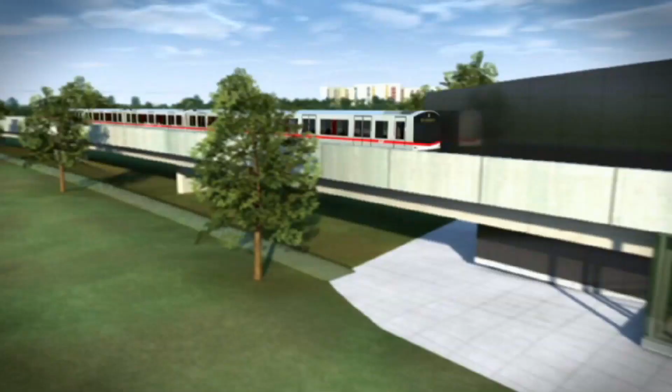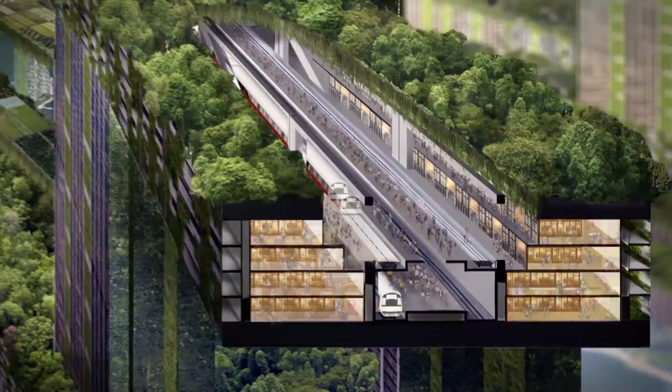It's happening here and now. New urban landscapes are emerging before our eyes. But what will our cities look like in 20 or 50 years? Will they be more livable? Or is urban improvement merely a utopia? The answer lies in intelligent planning, innovative building technologies, and urban greening.

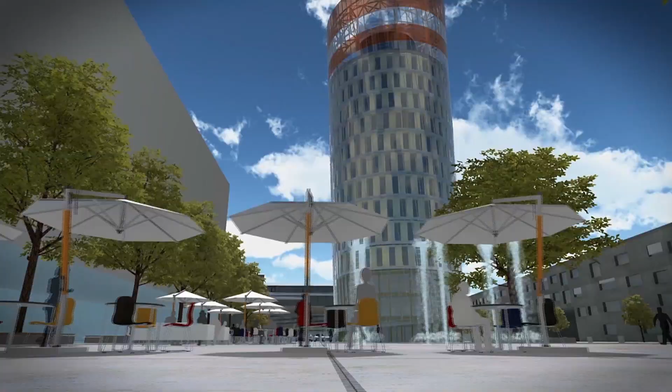Today's so-called smart cities are the proving grounds for the cities of tomorrow.

Singapore is a leading business location and on its way to becoming a so-called smart nation. The small city-state, barely twice the size of Vienna, can only grow in one direction, upwards. 96% of Singapore's 5.6 million inhabitants live in high-rise buildings. Sustainable construction is encouraged by the government, since water, energy, and building materials are scarce.

Singapore's University of Technology and Design offers classes in sustainable architecture. One of the professors comes from Austria.

And then the courtyards and all these open void spaces in between. But you can also see that the concrete elements are shaped in different ways, and these features also provide shade to these parts of the facade. Singapore, since we're almost exactly on the equator, we have most solar impact on the east and west facades. That's why on the north and south facades we have very long stretches of facades because there's not much solar impact. But then when you look at the ends, all the east and west facades are very small, so they don't have as much solar impact at the ends.

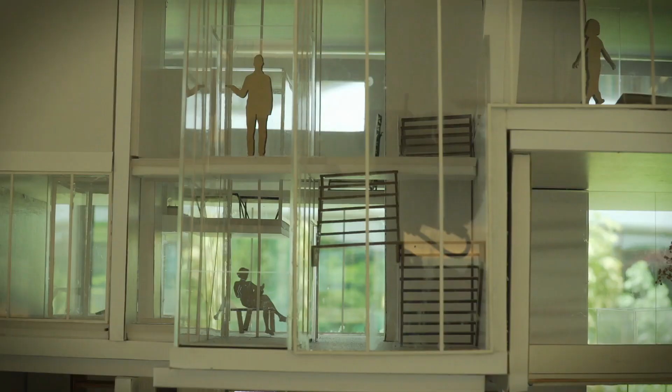The facade's overhanging metal and concrete elements shield against the tropical heat. The design allows for sufficient daylight inside while also providing shade and protection against rain.

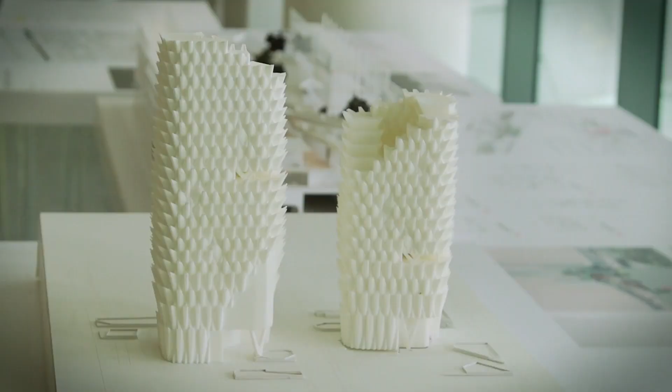In recent years, architects have also increasingly focused on greening. Singapore is often called Asia's greenest city. The tropical climate plays an important role as it helps the vegetation to grow quickly. In turn, this green component has a positive impact on the climate in the city. For example, the shade provided by the many trees helps keep the sidewalk and street pavement from getting too hot. And the green facades have a similar effect, providing shade to keep building temperatures much cooler than they would be otherwise.

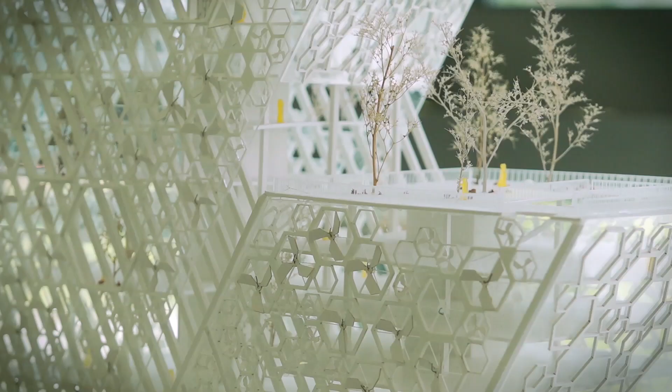Plants overgrow skyscrapers, forming lush vertical gardens that benefit the microclimate and quality of life. This urban jungle is a low-tech solution for climate issues. The city's green buildings make Singapore an international role model.

The United World College is a certified green building. The huge campus was developed with sustainability as the guiding principle.

It is only 8 a.m., and the outside temperature is already 30 degrees Celsius in tropical Singapore. With staggering amounts of energy used each day to keep this city's air conditioning units running, the school leadership was intent on finding a less wasteful alternative for keeping the classrooms cool.

In 2012, one of the world's largest solar cooling systems was installed. It was developed and tested in Austria. On the college's roof, high-performance solar collectors produce boiling hot water, even with diffuse sunlight, which often prevails in the tropics.

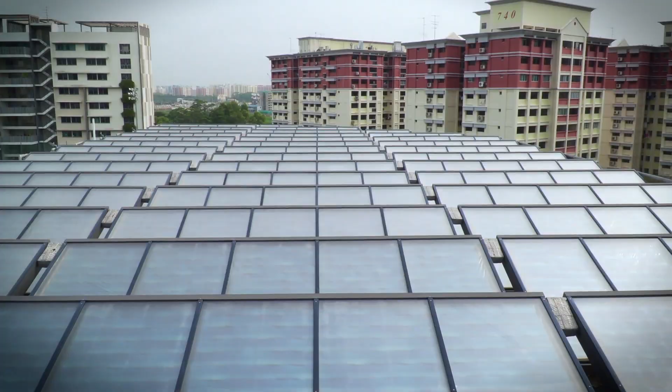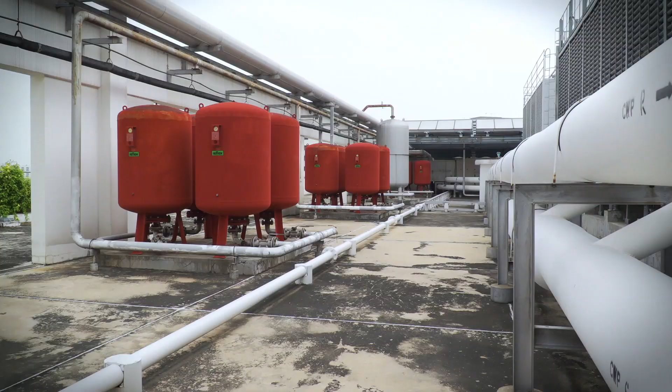The solar plant can supply the entire warm water needs of the school, its boarding home, and canteen. In addition, the solar-heated water is used to pre-cool the classrooms. As a result, the school building uses up to 60% less power for electric cooling than the average building in Singapore. The plant's dimensions are impressive.

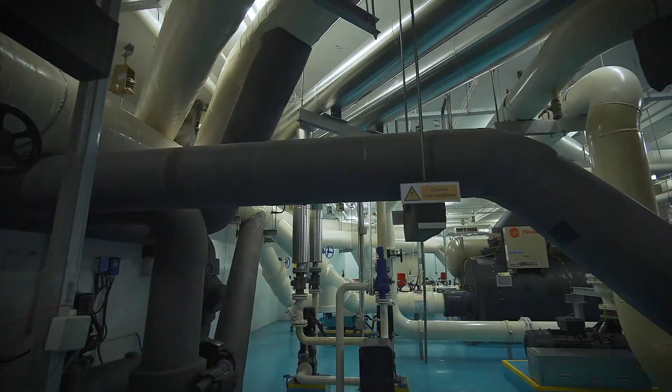The solar thermal collector field has a size of approximately 3,900 square meters. It is the biggest solar thermal system in Singapore. The heat produced by the solar collector field is transmitted to the solar storage tank via a network of pipes, which is approximately 2,400 meters in length.

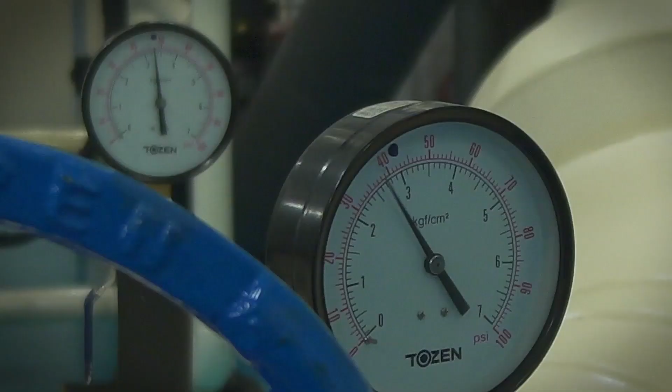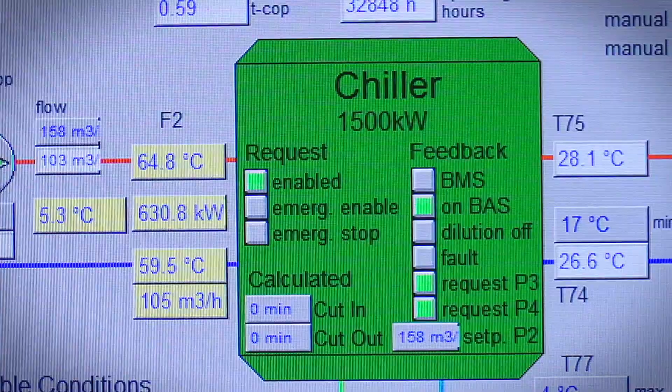30 minutes before classes start, the chiller is activated to convert the hot water from the solar collectors into cool water via evaporation. It is pumped into a network of pipes to pre-cool the classrooms. Thanks to its state-of-the-art facilities, the school has achieved Singapore's highest green building certification.

You're going to have to reload the whole page because of that sensor.

In the northern hemisphere, buildings must be heated. In the tropics, they must be cooled. These researchers have also developed an experimental concept for cooling buildings and are able to test it at the school. An office building was built according to their design.

In Singapore, if you want to look at energy efficiency in buildings, you're going to immediately point to air conditioning. It consumes about 60% of the building stock's electricity consumption in the country. We're looking at adapting very thin, compact air conditioning systems that are more energy efficient.

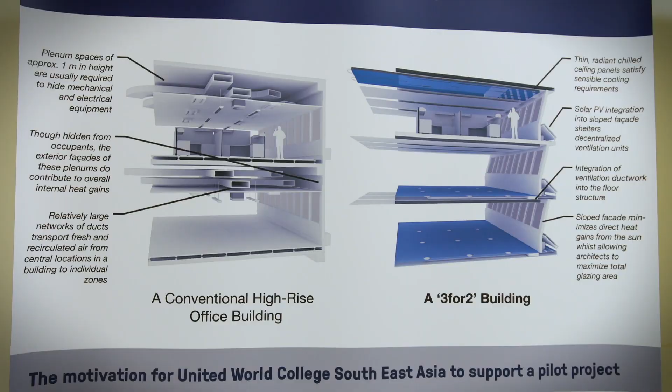A developer who builds a high-rise building may not be as incentivized with energy savings as they would about saving space, either making things larger, more atrium-like, or perhaps, as 3 for 2 is, putting more floors into the standard space of 2. So that's, in a nutshell, the concept. What we've done here is build a pilot to demonstrate this technology.

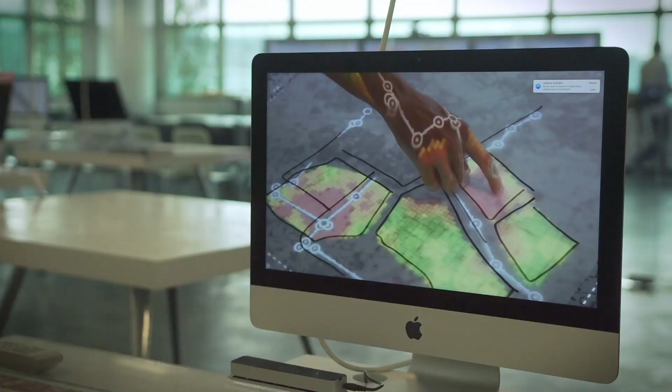The building design concept was developed at the Future Cities Laboratory, a testing ground for futuristic research established in 2010 in Singapore as a branch of ETH Zurich. Over 100 architects, urban and traffic planners, engineers, IT specialists, and historians from 29 nations are here to plan the cities of the future. A young engineer from Austria is assisting the project group for building cooling.

The big difference between conventional systems and our 3-for-2 concept is that we use water-based cooling instead of the usual air-based design. This has several key advantages. For one, it's more space efficient because we use relatively thin water pipes instead of large air ducting. Plus, it is more energy efficient due to water having a much higher heat capacity than air.

An infrared camera shows where the thin pipes carrying cool water run along the ceilings. These replace the large air ducts used in conventional air conditioning systems. As a result, 3 floors can now fit in the same space as 2.

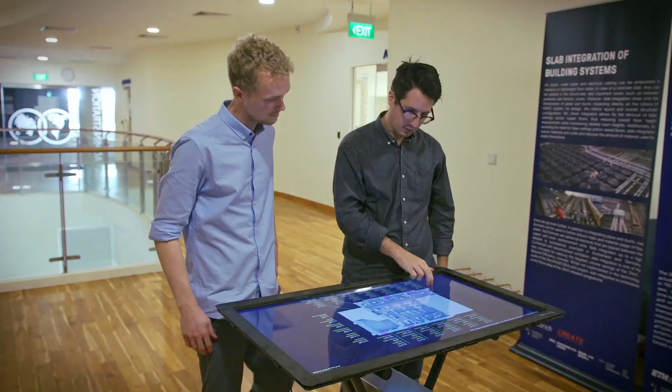With more and more people living in cities, and climate change as well as urban heat effects causing temperatures to rise, an increasing number of high-rise buildings will need energy-efficient cooling systems.

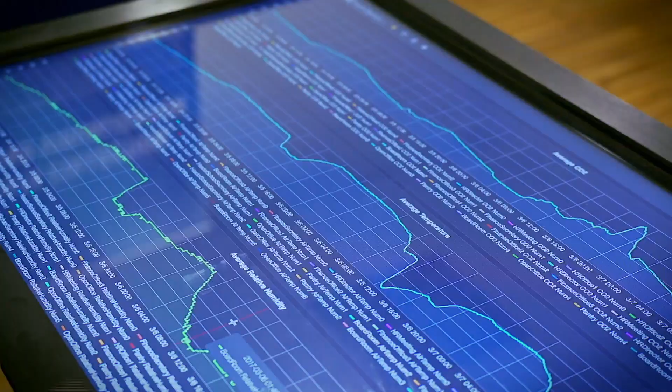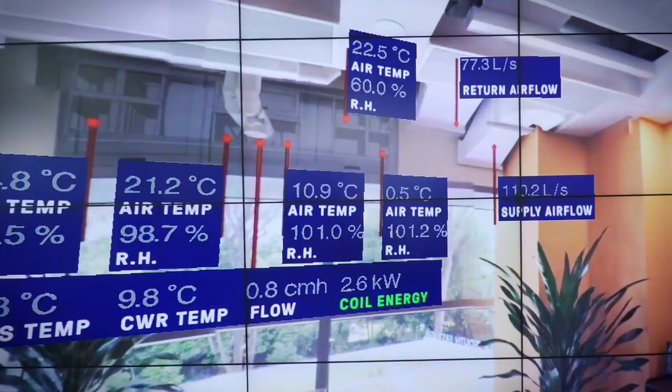Sensors installed in the school office provide the researchers with continuous real-time data. The data can also be accessed online by scientists anywhere in the world, allowing them to take virtual tours and learn from the pilot building in Singapore.

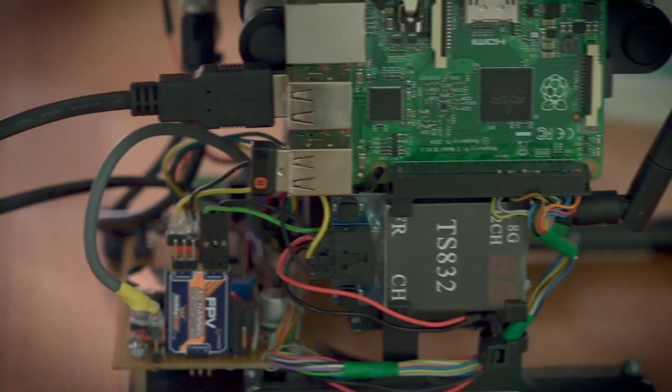Digitalization, rapid data transfer, smart software, and high-tech electronics are revolutionizing the field of construction research. New imaging and simulation technologies are being tested in Gleisdorf, Austria.

We need to get the entire side of the facade to clearly distinguish the windows and thermal bridges. Right, we need to watch the trees.

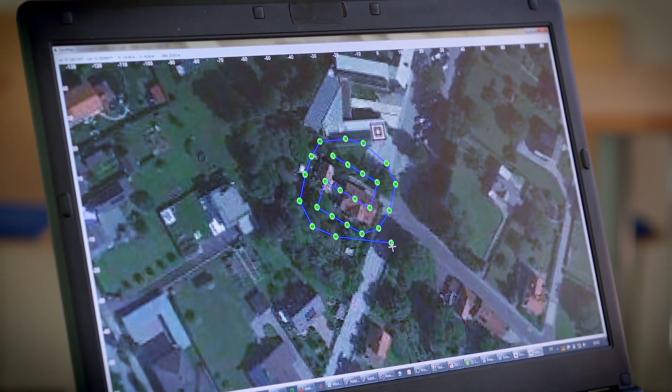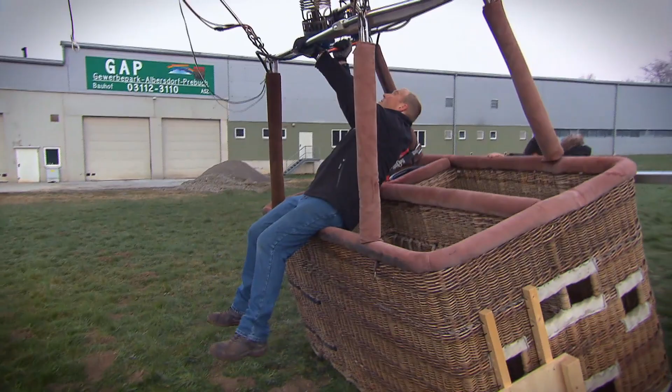This one-of-a-kind research project started during winter. The early morning cold presents the ideal conditions for the high-tech cameras, which are mounted on a hot air balloon. Their job is to capture color and thermal images of entire city districts.

The researchers are systematically scanning for hotspots, or buildings in need of improvements, which are much easier to spot from a bird's eye view.

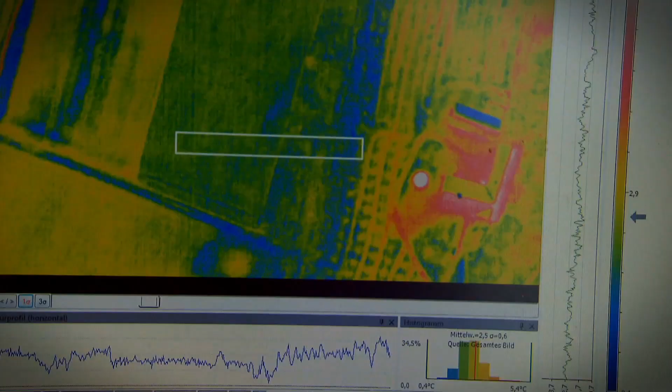Hotspots are what we call areas in a city where energy efficiency is low. This can be due to heat losses on facades or roofs, using the wrong energy sources for heating, and so on. There are a number of criteria for defining a hotspot, so we need to analyze the information in more detail.

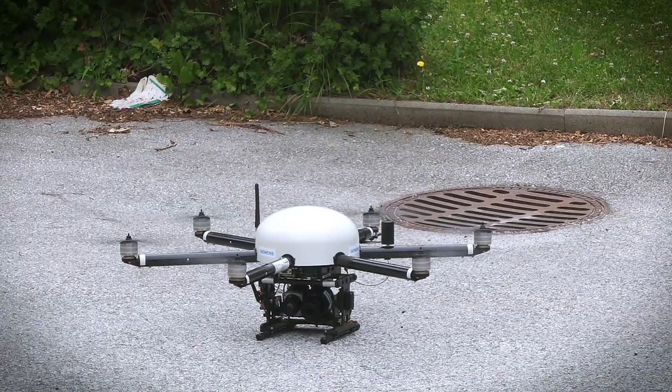Technically advanced drones equipped with infrared cameras are used in the second part of the research project. Thermal imaging from the hot air balloon has identified the city's problem zones, but these must now be surveyed in more detail using the drones.

These are the color and thermal images. The aerial images are fed into image processing software that was developed in Austria specifically for this project. It generates a three-dimensional model on which the thermal images of each house or entire city districts are superimposed.

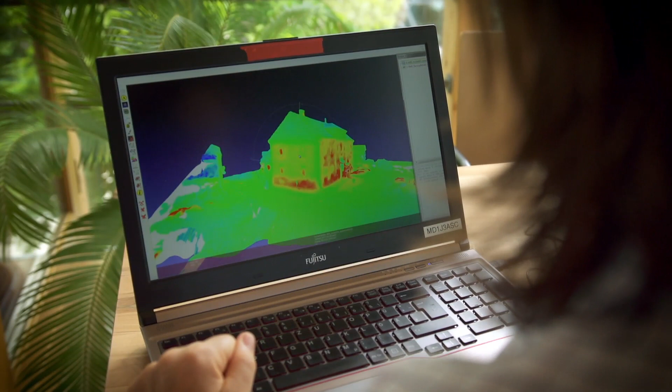3D imaging offers a major advantage. Not only can I view an individual facade, but also the building's corners, ledges, eaves, and roof. I can identify all of the hotspots and thermal bridges from a single image, and I can also rotate the view to more easily determine the needed improvements.

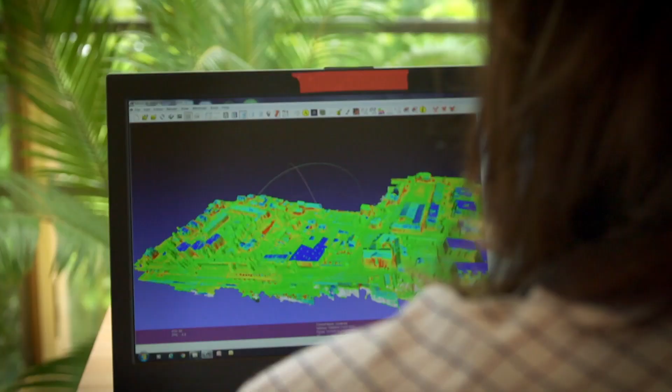The 3D analysis identifies energy losses. The simulation software recommends the necessary improvements. This provides valuable information to city leaders and homeowners alike.

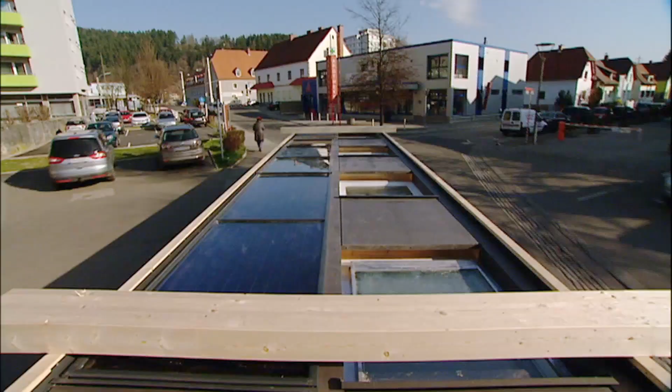The need for improvements is huge. Nearly half of all buildings in Central Europe date to the post-war decades. In Kapfenberg, too, the focus was on building quickly and cheaply.

Today, a pilot project is underway to test a completely new renovation method that does not even require residents to vacate the building.

The method is being tested on an aging building dating from the 1960s. The former energy guzzler will be turned into a modern plus-energy house that produces more energy than it consumes.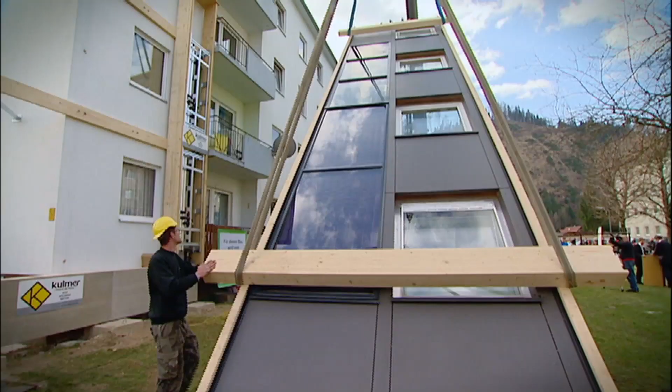Ready-made, high-tech facade elements containing the building's entire technical systems are being installed on the outside. It took researchers over 2 years to develop the prototype.

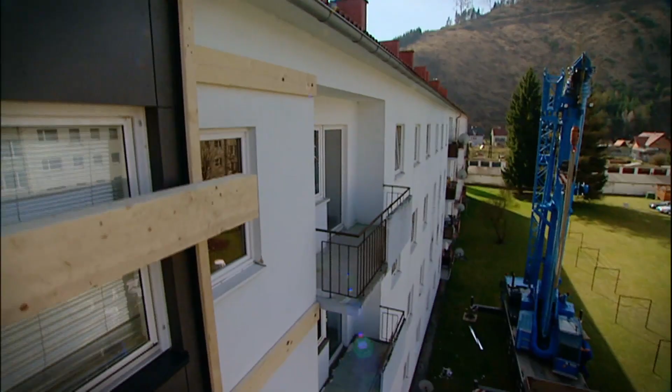It's great when others acknowledge that you have created something innovative.

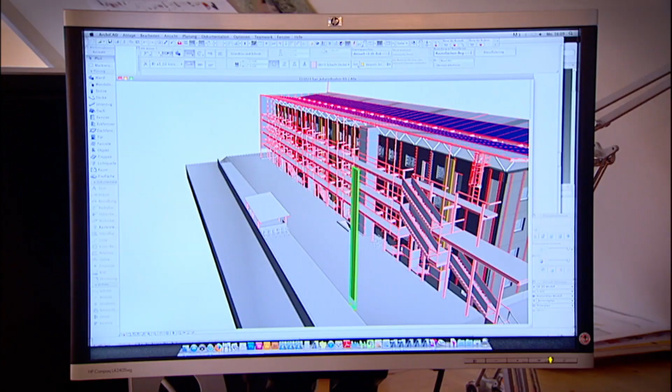The prototype will be tested on the building for 6 months with continuous monitoring and optimization. The curtain wall will envelop the old building's exterior, heating and insulating it, and even producing electricity and hot water from renewable resources.

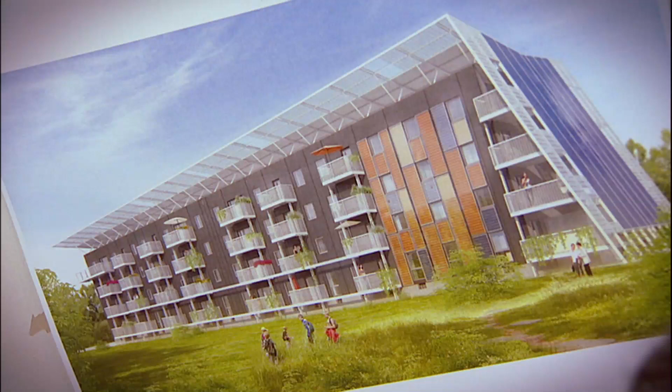I'm convinced that this will be the future of construction. From planning to the building's equipment, all we do will be based on ecological sustainability. If not, the future will be bleak. So it would be irresponsible of our profession to act otherwise.

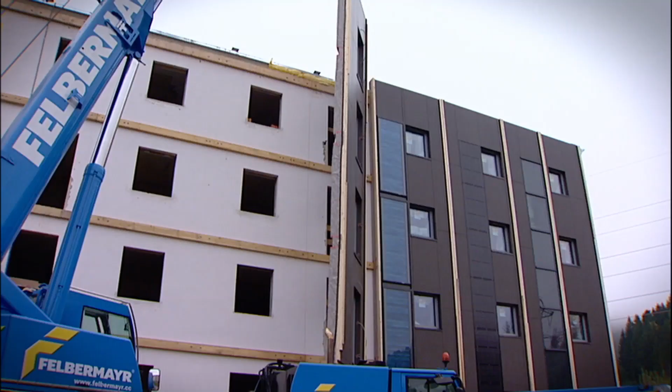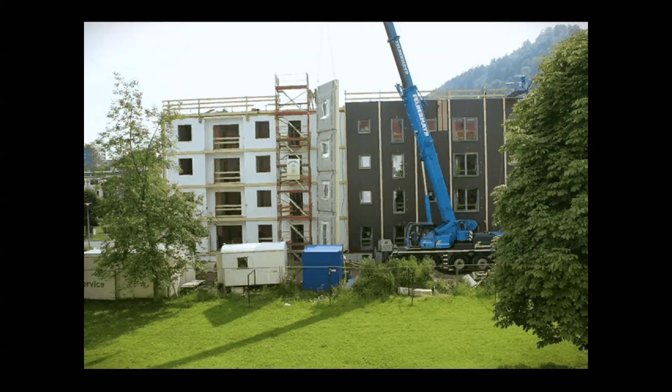The prototype has proven successful, and the multifunctional facade can now be permanently installed. Water pipes, power lines, and thermal insulation are all integrated in the prefabricated elements. It takes only a few weeks to complete the renovation.

The newly adapted building stands among its outdated neighbors. It is able to generate nearly all the energy it needs using the components integrated in the curtain walls and roof. The new facade system benefits everyone: inhabitants, owners, and environment.

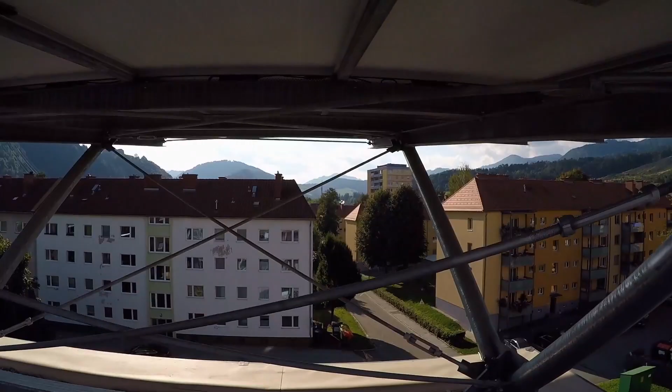After 2 years of testing on the building in Kapfenberg, the new system will go into series production.

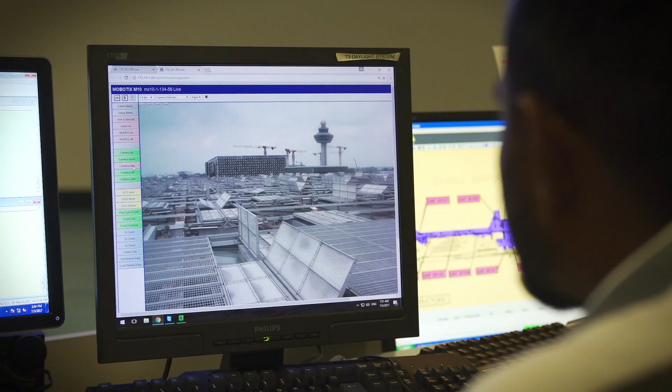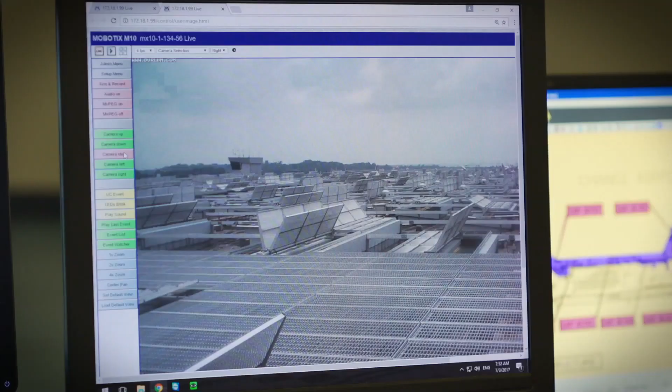Lighting specialists from Tyrol have developed a unique daylight system for Changi Airport to ensure a sense of well-being. The key innovation is located on the roof, often unnoticed by travelers. Movable panels are positioned above each of the 900 skylights of the departure hall.

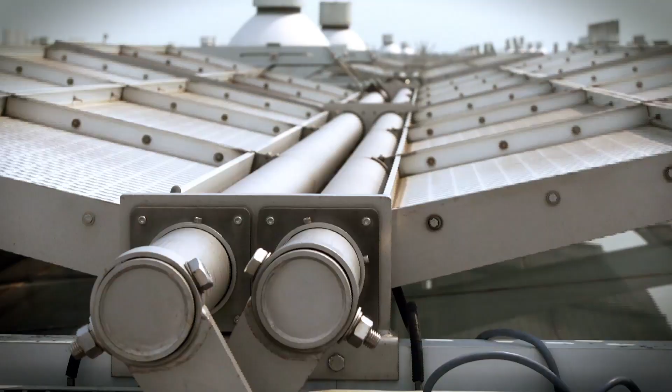The panels open and shut like butterfly wings, depending on the time of day, angle of the sun, and weather, to let in the right amount of natural daylight while keeping out the heat. Aluminum reflectors help direct the daylight, and thousands of perforated metal panels hanging from the ceiling disperse the light to maintain perfect daylight conditions inside.

Artificial lighting is only used at night. The light management system not only ensures traveler comfort, but also saves power for lighting and cooling, so additional costs have been recovered in only 5 years. The high-precision reflectors efficiently and equally disperse light without blinding. The innovative system and its Tyrolean developers are now known around the world.

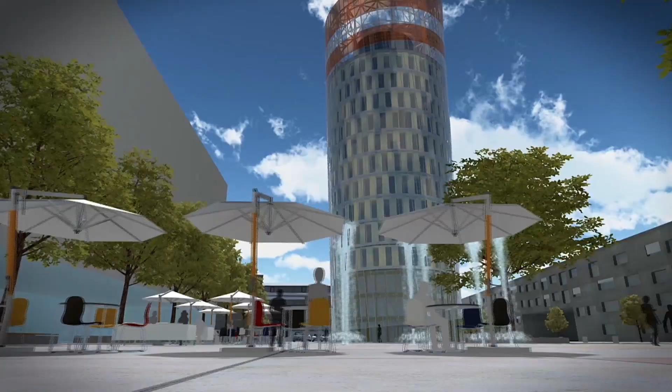Cities occupy only 2% of the Earth's surface, but consume 75% of all resources. Clearly, we must change to a more sustainable lifestyle that consumes less energy and natural resources. Animations show what a smart city might look like, in this case on a futuristic walk through Graz.

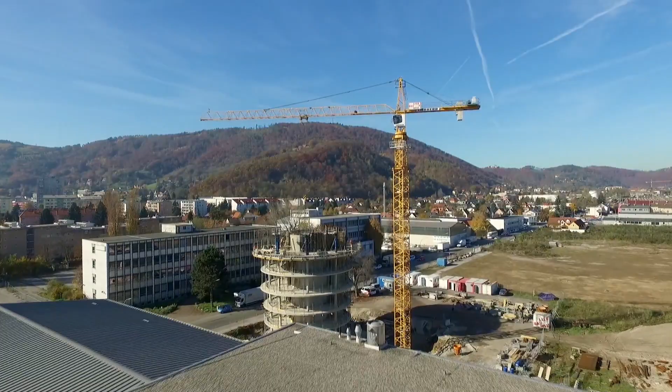The Styrian state capital is receiving a new landmark, the Science Tower, which is being erected next to an event hall on the former site of a steel plant. The tower will stand like a sculpture in the heart of a new smart city that will be completed piece by piece by 2024.

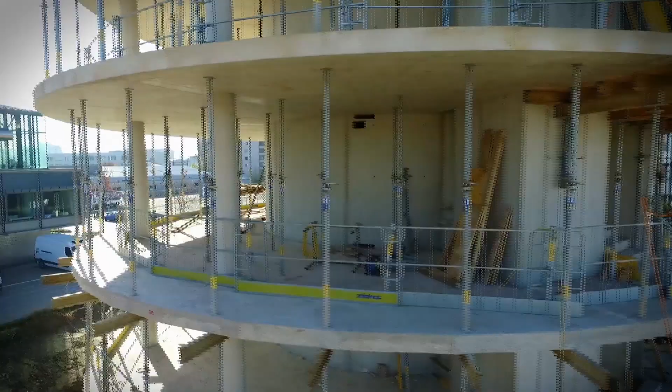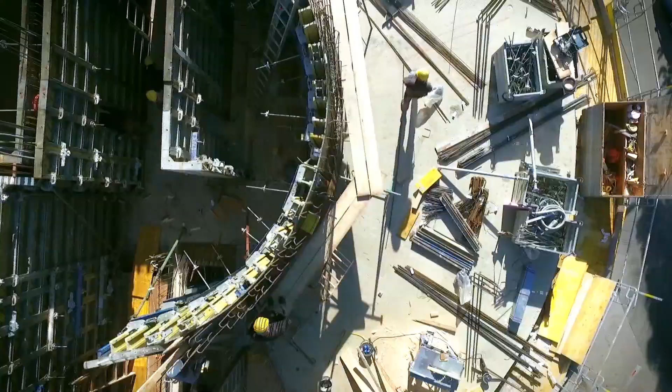As its name implies, the new Science Tower will also function as a technology laboratory. New energy technologies are being tested on the building, and soon it will house research companies and startups focusing on green technologies. Built in the present, the tower symbolizes a more livable urban future, while providing a view onto the city emerging around it on the 400-hectare site.

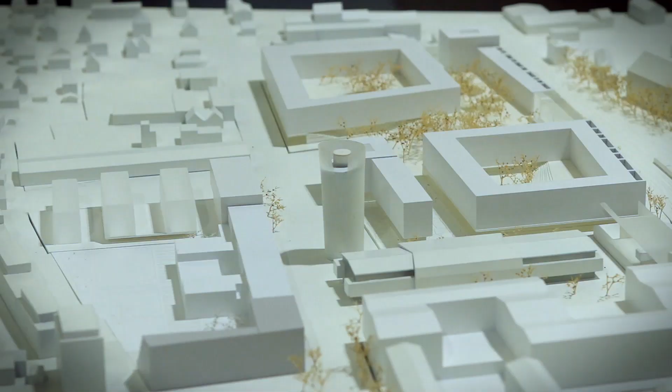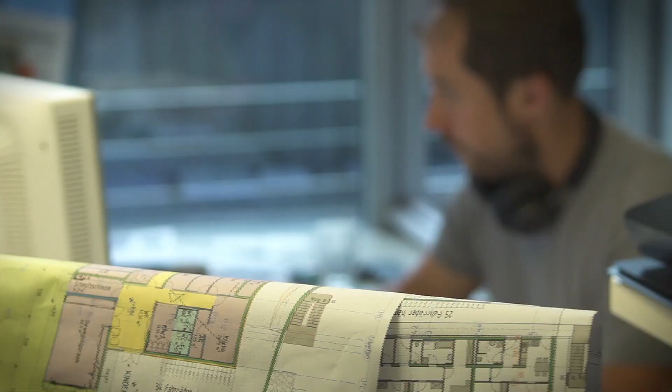In Graz, there are 60,000 students attending universities, and a number of leading international companies make their home here. Overall, Styria is currently the region with the highest research and development rate in Europe. And I think that's because we've been able to build a fertile environment for it. So I don't think it's a coincidence that this Smart Cities project is happening here in Graz.

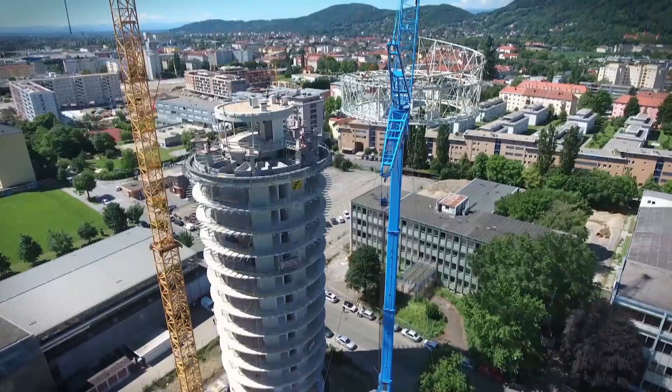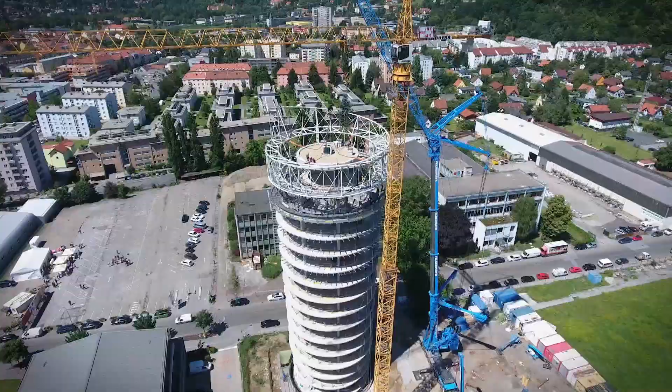The Science Tower is an impressive new landmark and the centerpiece of Smart City Graz, one of several hundred urban development projects in Austria. Funded by the Austrian Climate and Energy Fund, the project is unique in Europe. A metal collar installed atop the 60-meter-high building provides the supporting structure for its innovative energy glass.

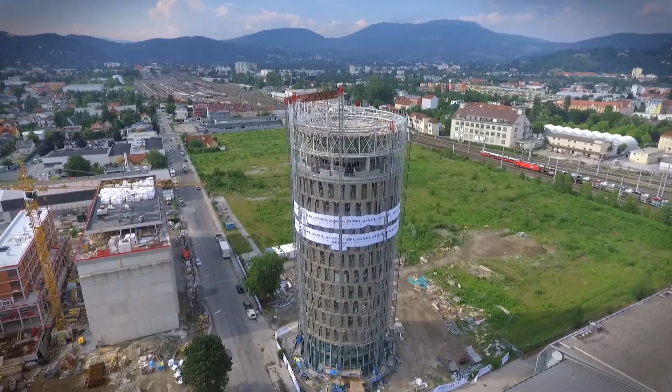We first looked into what technologies might fit in the tower 10 years ago, starting with the facade. Well, we learned that we could use it to harvest energy and perform energy management functions.

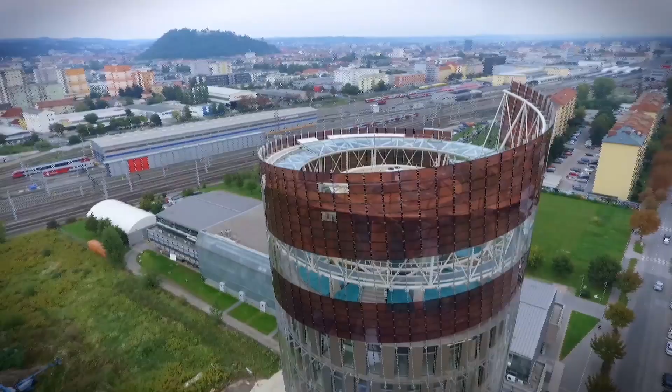So we developed a totally new glass technology on the basis of work done by Professor Grätzel.

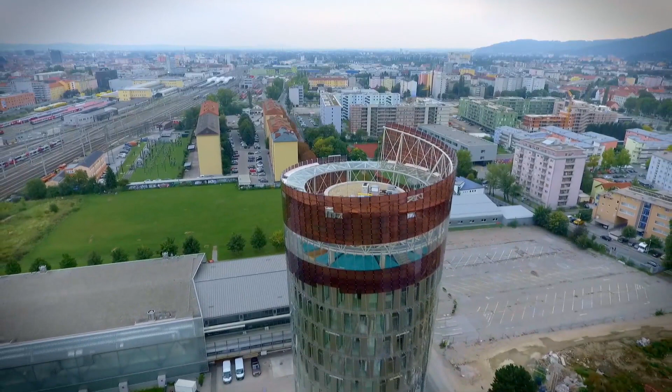2 years after groundbreaking, the tower began functioning as a small power plant. At ground level, 12 200-meter-deep holes were drilled to use geothermal energy.

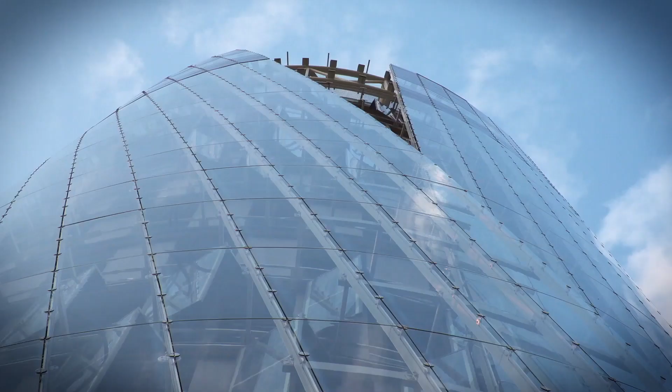Around the tower's exterior, 2 thin glass layers, each only 2 millimeters thick, hardened in a salt bath at 450 degrees and laminated.

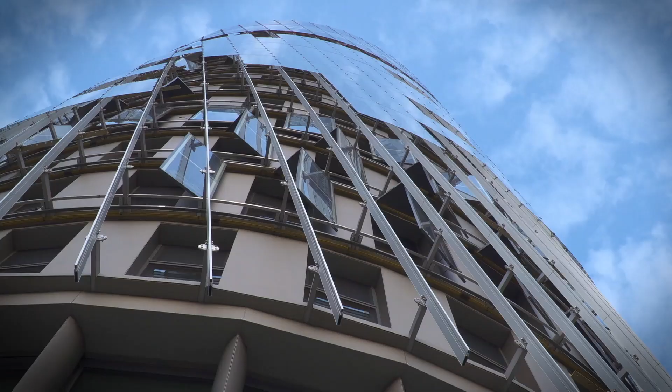Next, ultralight photovoltaic modules which follow the sun, circumnavigating the building every 24 hours. They provide sun protection and produce electricity.

And at the very top, the peak innovation, revolutionary energy glass with dye-sensitized cells, invented by the Swiss chemist Michael Grätzel. The cells absorb sunlight via dye pigments instead of silicon to produce electricity.

When we began designing the building, energy glass was purely in a research stage. The first Grätzel cell back then measured only 1 square centimeter. Great potential, but much too small for a facade.

So we didn't know if it would be ready in time, but we were all convinced that it was the right technology.

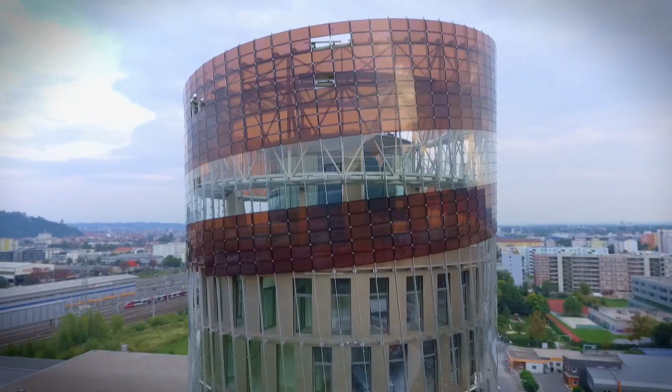The cells generate electricity even in diffuse light, with excess power fed to a microgrid. In the near future, electric vehicles will be able to charge their batteries at the foot of the tower.

In the meantime, the building's first occupants have moved in. They have big plans for the highly livable urban future that is coming into being on the idle industrial site, no doubt encouraged by the latest innovations in building technology.

We considered a lot of different potential solutions. You could describe the process as moving 2 steps forward and 1 step back. And it's not finished yet, because in the years to come, the Science Tower will continue to be used for testing and implementing new technologies.